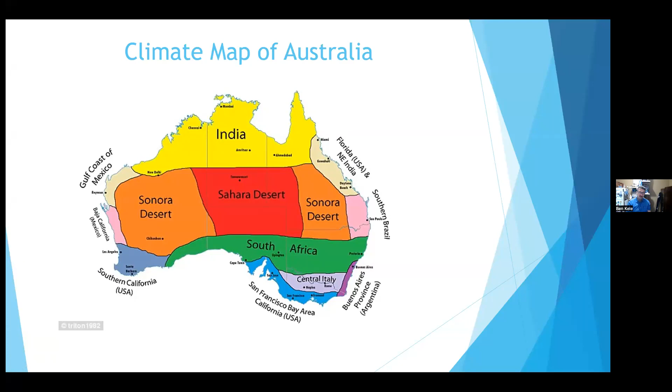My part of Australia is here. Basically, I'm located in the Florida of Australia, which many people who know my personality would associate me with Floridans anyway. But Australia being a continent nation, we're very similar in size to the lower 48 in the US, but we've got a vast variety of different climatic zones. I'm in the wet tropics, and the Great Barrier Reef runs along through this area. So I'm also on the Pacific Ocean, the other side to where you guys are at the moment, but surrounded by coral reefs and tropical climates.

Now, my crew absolutely loves working out on the Great Barrier Reef and the island communities out there. So the types of technologies that we work with, we've got options which are specifically designed for tropical islands and have been working on tropical islands for decades. And yeah, the type of technologies that we get to use in the more temperate zones or the desert zones here in Australia, you just can't cut and paste them into an island situation. We're very big on making sure that we've got fit for purpose technologies as we travel through.

So I actually grew up on an island. My family owned an island on the Great Barrier Reef that was a reasonable size. We were able to run 1,000 head of cattle. But because of that, I'm fully aware that doing work on islands is much more expensive than doing things on the mainland. You've got a lot of double handling on freight. You've got barges and air freight of things coming through. It's difficult getting people onto the island. You've got your skill shortages.

So people on the mainland are complaining about skill shortages. People on islands, it's that much worse. And you've got different conditions between islands, right? A volcanic atoll is very different to a sand island. So you've got to make sure your technologies are fit for purpose. So the northern part of Australia and the Great Barrier Reef is very similar to the island situations that you've got there in Hawaii. And we've got many issues about protecting the reef. So where the big campaigns are about reef protection around Hawaii, we've got them here in Australia as well.

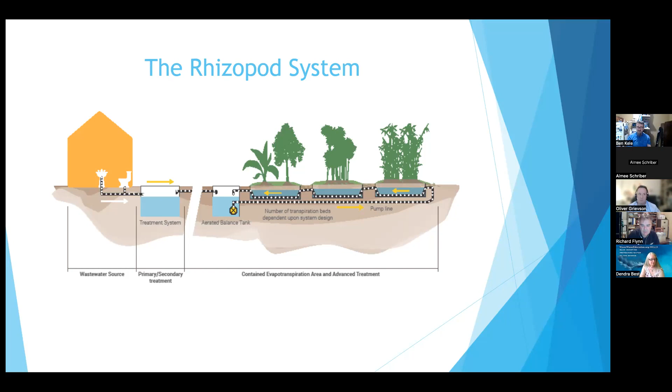So you'll have your septic tank or wastewater treatment system there, goes off into an aerated balance tank, pumped through a series of pods where you grow plants. And in tropical conditions, we quite often grow bamboo. And the reason why we like picking bamboo is that a mature clump of bamboo will use around 300 gallons of water a day. And using the Australian expression, you can't kill it with 3 bushfires and 10 litres of herbicide, right? It's so close to being a weed that it's very hard to kill. So you're chasing something that uses a lot of water and is environmentally resistant.

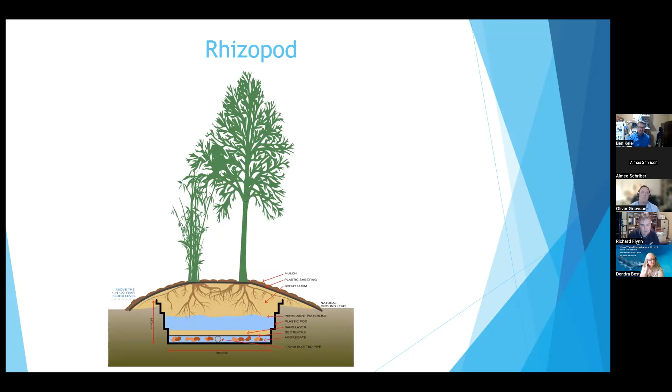Now we can do a plastic pod like this one or a concrete pod. And the whole idea is you keep your wastewater contained. It's not able to leach out into the environment. And you can put these on solid rock. So if you've got a property which is a lava field, you can actually put the concrete versions of these up on the surface. And this particular site here, it's right on the coast. The Great Barrier Reef is only 150 feet away from where this site is.

It's using around 5,000 gallons a day. This is an RV park at a coastal community. And the bamboo, which is growing through there, none of it's being released. It's not going into the freshwater lens underneath the site. It's not going out into the reef, which is just nearby. It's all being reused in a non-release manner.

Another thing that we try and do is use volcanic rocks. So Hawaii is an island full of volcanic rocks, full of zeolite and scoria. My PhD, if I ever hand it in, and it is over a decade later, and makes my supervisor cry, is all about using zeolites and scoria to be able to treat on-site and decentralized wastewater. So this is cation exchanging contaminants such as ammonia out of the water, and it will actually absorb things like phosphorus. So where you've got your brown water problems around Hawaii at the moment from all the cesspools discharging into the lava tubes, that volcanic rock can actually be turned into a filter media and be able to treat the water.

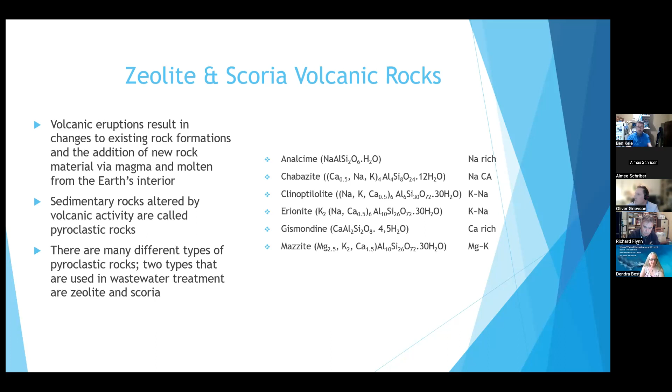And part of me is actually thinking that part of the issue might have been these lava tubes have been used to dispose of the water from the cesspools for so long that the cation exchange capacity of the volcanic rock directly in contact with the wastewater in the lava tubes has become exhausted. This cation exchange capacity doesn't last forever. It can last for years, it can last for decades, but it won't last forever until the ion exchange media is regenerated. So I think part of the issue maybe with the cesspools in Hawaii is that the ion exchange capacity of the lava tubes has been exhausted.

But for economic sustainability, being able to harvest fresh volcanic rock, zeolite and scoria, and putting them into the treatment systems would be a fantastic way of using a local resource in on-site wastewater and be able to keep the costs down. And each volcanic rock makes its own. So each volcano produces a different cation selectivity. So where we're trialing different media through here, some of them are very good at taking ammonia out. Some are more focused on taking sodium out or calcium or potassium. Each volcano basically made its own.

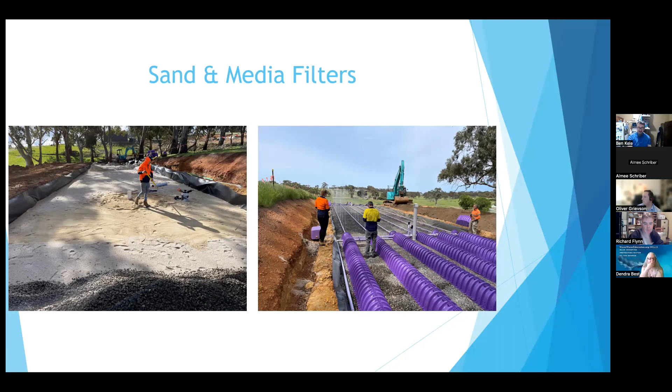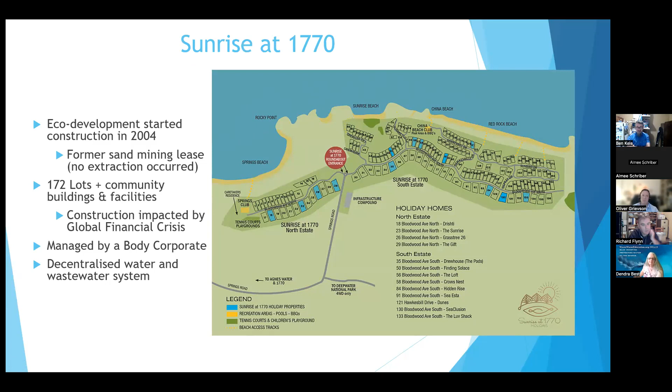We've done these types of things on a variety of developments. So this is, once again, the Pacific Ocean out there and the Great Barrier Reef, sorry. And yeah, we've put in these types of technologies using zeolite to treat the water on these types of developments. You can see there that it's a high-end type of development. They're really selling the view. The sewage treatment plant, unfortunately, is on the other side of the hill and doesn't get this view out through there. But it's, yeah, very handy.

So, conclusion. Living on an island, I'm sure you'll agree with me that cut and paste solutions from the mainland don't always work in an island community. And if you're putting something on an island, you want it to be robust and reliable. You don't want it breaking down every other week. It's that much harder to get the proper maintenance. Using materials available on the island and using local manufacturers is essential, as well as training local people in design, construction, and maintenance. If you can't get that support there locally, in 2 years' time, you'll come back and your treatment chain will have fallen over due to lack of maintenance.

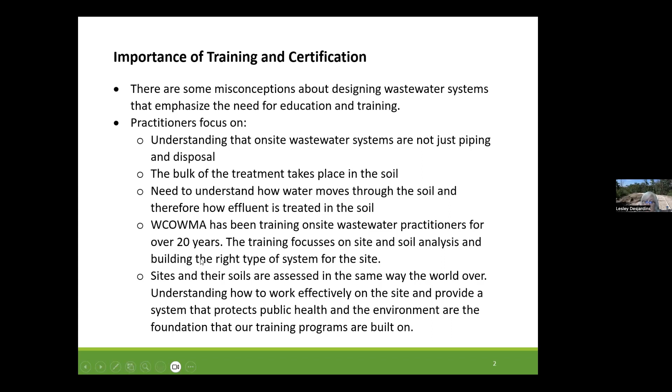So we assess site and soil the same way everywhere in the world, even though soils vary, of course, from region to region. And so understanding that and how to work effectively helps us to develop plans for systems that protect public health and the environment.

So some of the challenges that we face, and I'm sure that are typical in Hawaii, we have challenges with footprint size, so small sites. I don't know whether you're experiencing this or not, but we're seeing more and more larger homes on small lots. We have challenging geography here in Canada. So even though we have prairies where you can dig all the way to Asia if you want to, we also have fractured rock and volcanic rock and things like that. So we have challenging geography that we have to address, just as Hawaii does.

We have a lack of soil depth, particularly in British Columbia, and we have to address that. And we also have a lack of appropriate soils in certain areas. So we need effluent to be retained in the soil for a period of time long enough to ensure that treatment occurs. So when we have a lack of soil depth and very poor soils, then we have to increase our technology in order to address that so that we can again get the treatment that we need.

We also deal with challenging weather conditions. It's not 40 degrees here like it is for Ben, but we have extreme heat in the summer and extreme cold in the winter. And in British Columbia, we have extreme precipitation. So all of those things impact the types of systems that we can design and install to provide that infrastructure that unsewered homes need.

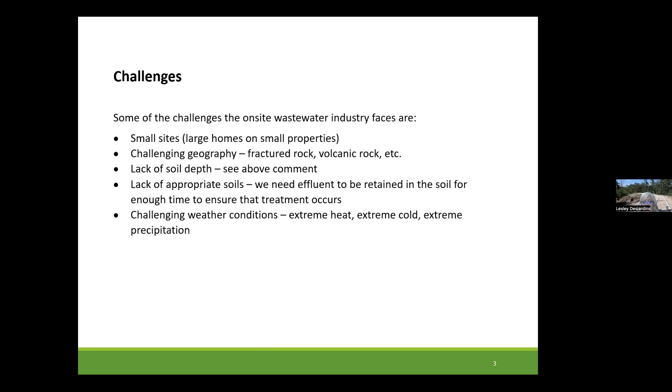So we're always looking for innovative solutions, and I'm not going to go over every innovation that we have utilized over the years, but one of the more recent ones, and we're talking recent sort of in a decades type thing, are what we call LFH grades. And I'm going to speak to these specifically because I understand there are a number of, I think they're called Albizia trees, correct me if I'm wrong, that are sort of an introduced species and that are nuisances, and you have a lot of potential wood chips, and these types of systems utilize wood chips in their design and installation.

So this is a system that was developed by industry, and it was developed for sites that were heavily treed or at least fairly well treed with poor soils and shallow soils. So sometimes less than 12 inches of soil or just at 12 inches. We researched this technology at the University of Alberta and University of Calgary, and found that we achieved really excellent treatment within a foot of the soil surface where the effluent was being applied. So I thought I would speak to that because I think it is a technology that might be an effective technology in Hawaii.

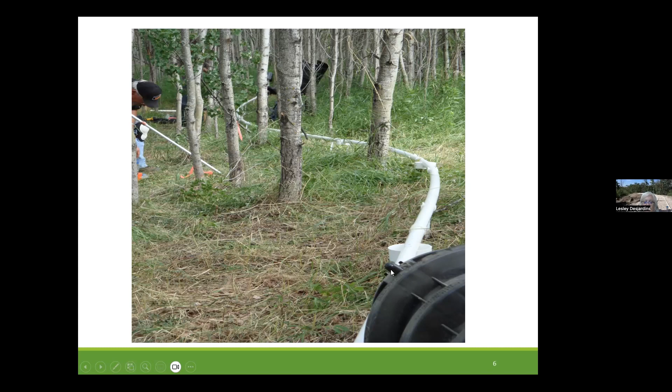And the effluent is delivered through orifices that are drilled along the lateral lines here. These are distribution laterals, and they're pressurized so that when the pump comes on, they produce a certain volume of effluent that sprays out of the orifices. These are diffusers here that help to ensure that we don't point load, so that when the pump comes on, we're not drilling a hole basically from the high water pressure into the surrounding area, but that it spreads it out.

So once we build our pressure system, we use these, they're called chambers, and they go over top, and they provide two sort of purposes here. They hold oxygen because they have a void space inside, and they also act as an upper orifice shield for the pressurized lateral lines. So we lay those out over top of our system, over our pressure system.

And this is actually the delivery line, but I just wanted to demonstrate that this whole system is now then covered with wood chip. So what we do is we utilize the leaf litter layer to help disperse the effluent over a larger area, and also the microbiology. The bugs in the leaf litter are very good at consuming pathogens, as are the bugs and bacteria in the soil, very helpful for treating wastewater.

And so we cover this whole thing with wood chip, and after it's installed, you really can't even tell it's there. And over time, the natural forest activity takes over, and you'll get the undergrowth that normally occurs in a treed area and that kind of thing. And so the trees and vegetation typically uptake quite a bit of the effluent and nutrient.

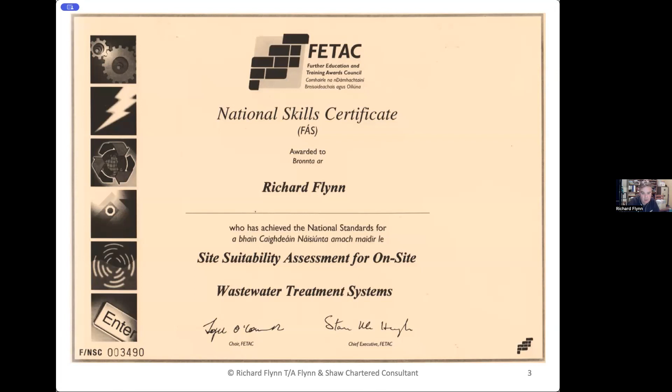In Ireland, we don't have a licensing system: site assessors, system designers, installers, maintenance personnel. No one is licensed. It is desirable as a site assessor to carry out specialist training, and there is a specialist training program, site suitability assessment for on-site wastewater treatment systems, which the majority of site assessors complete.

We're relatively new in terms of legislation. We have an EPA Code of Practice 2021, which really came from a manual that was designed and produced in the year 2000, followed up with a Code of Practice in 2009. We finally got around to revising that and updating it, and we have our new code, which was produced in 2021, and is current law.

Problem sites is really what I deal with. The issues really are questionable site suitability assessment. Has the site been assessed properly? Poor quality wastewater treatment system design. Has the right design gone in? Has it been installed correctly? Has there been maintenance? Obviously, lack of maintenance is a serious problem. And again, there's no oversight of treatment systems. Once they go into the ground, that's it, they're forgotten about.

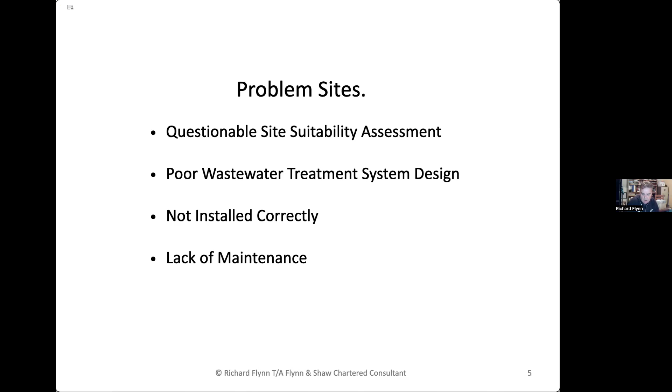As Ben said, one size doesn't fit all. So a lot of the solutions we come up with are site-specific solutions, following site suitability assessment, soil analysis, depth to water table, percolation tests. I'm just going to show you one particular design that I came up with a colleague of mine, Phelim Harty, who specialises in reed bed and constructed wetland design. Phelim is a consultant in private practice, and he has kindly offered to do a presentation, which hopefully we'll have in the next couple of months, on his area of expertise.

This particular site, an existing house on the shores of Lough Derg, is very much a nutrient sensitive area. The important thing for us was not alone just to put in a good quality treatment system, but also to try and reduce the amount of nutrients being produced. So what we did is we produced a partially raised bed, again shallow limestone bedrock. We imported. We were lucky we could source suitable sandy gravel. It's not always possible. In some areas we actually use crushed glass. We do have one or two good suppliers of crushed glass.

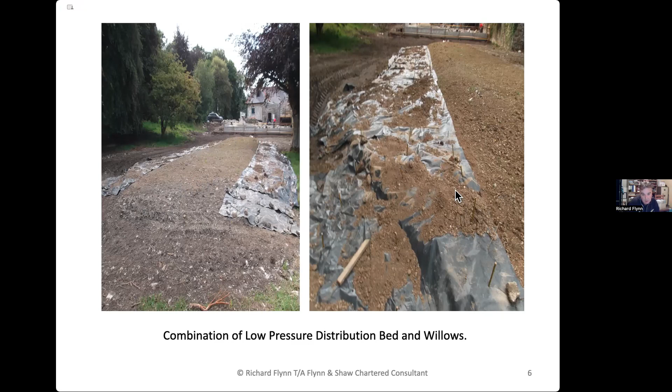But in this particular case, as you can see, we put in our partially raised percolation area polishing filter using low pressure distribution. And we planted willows on either side of the bed. So what happens is the willows are coppiced alternately every 4 years, cut back to the bone, and they reproduce, and you can see them there in full growth. It's a good solution. It's a practical solution, best practice solution, and results in an environmental gain, and also protects the nutrient sensitive area of Lough Derg.

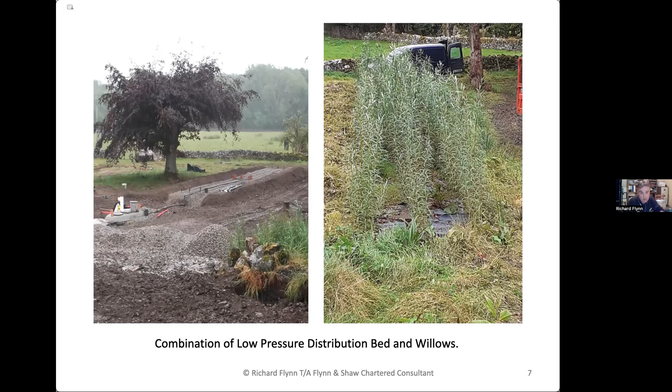Again, it's probably something that could be used in Hawaii. It's a possibility. I can share information on this in a lot more detail for anyone that wants it. We can share it offline, or we can share it on our website. So that's short and sweet. I'm not going to get into any more details.